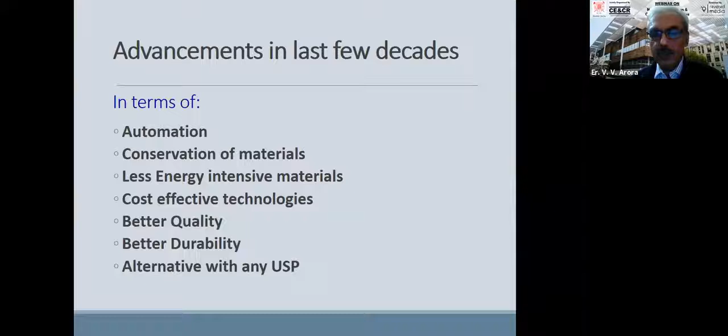The advancements have been in terms of automation, conservation of materials, less energy intensive materials, cost-effective technologies, better quality, better durability, and alternatives with any other USPs. Basic requirements when we do developments in civil engineering are that it should be a sustainable development and should be a safe development. Our focus has to remain on that, that things are sustainable and they are safe for the future.

For sustainability, we need emission reduction and conservation of natural resources. So we have to use low energy intensive materials, waste-based materials, use lesser materials, and increase durability, because if structures last longer, then also you are saving on materials, which is possible through proper design for durability. That is what we call performance-based design. You can optimize the design according to the performance, so you are achieving better durability and better sustainability.

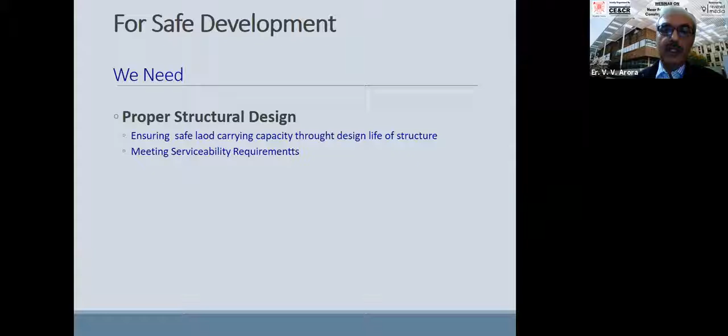For safe development, we need proper structural design, ensuring safe load carrying capacity throughout design service life and meeting serviceability requirements. And robustness, safety against unforeseen, unwanted actions, less fluctuations during the use, design for fire, design for blast, design for impact. Those are the things which are coming up.

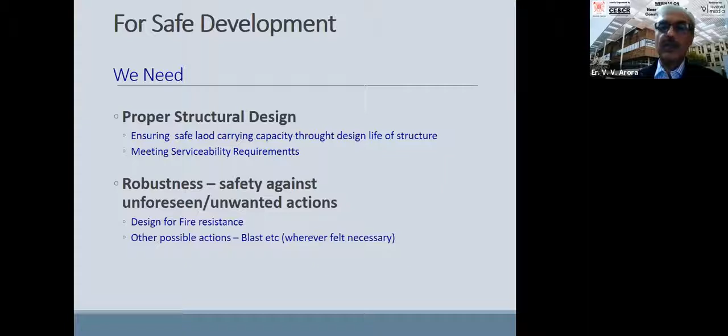Newer practices and materials, if you talk of, then increased use of materials we will see in near future is the supplementary cementitious materials, which are already in use in this decade, fly ash, silica fume, etc. Blended cements, slag cement, and now the tertiary blend cements are coming, composite cement, and LC3 cement, that is limestone calcined clay cement, is also coming now.

High strength concrete was there since long, but there were no specifications in our design. Our IS 456 did not have design parameters for high strength concrete. We could make high strength concrete, but designing structures with high strength concrete was a bit difficult. So that will become possible now. High performance concrete had come in NBC, but it is still to be better defined for better usage.

C&D waste-based aggregate usage has started, but it still has to go a long way. Precasting is increasing, precast elements, and that is also to go a long way in the near future. Other newer practices which have come now are pervious concrete, geopolymer concrete, controlled low strength material for backfill, etc. Because everywhere soil backfilling doesn't sustain, many times you have problems of settling of the backfills because we could not compact it properly. The new thing coming is 3D printing. There also significant developments have taken place.

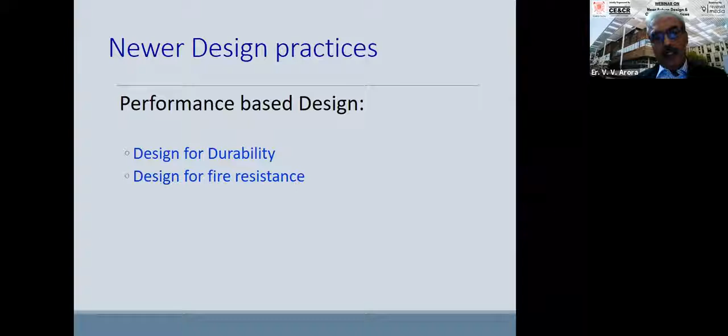Newer design practices are performance-based design, design for durability, design for fire resistance, etc. There's a lot of work on design for durability world over, even in our country also, but less on design for fire resistance. We will discuss that.

Then comes the role of standards. You see, we have seen many times technologies are available, but they don't get into much use in the absence of specifications and codal support. Recently, a lot of work has been done in this direction. This is necessary for promotion of newer technologies. Some BIS standards have been published or revised recently, and somewhere we are the leaders in the world also. Some standards are under revision and preparation. These are some of the revised standards and new standards in the last few years.

National Building Code came in 2016. There were big revisions in the fire chapters, and the sustainability and high performance concrete chapters had come in that. IRC 44 on concrete mix design has been revised, and pervious concrete has also come in that. Guidelines for use of C&D waste have come up in IRC in 2017. So that will also promote usage of C&D waste.

IS 383 for aggregates has come. That is, alternate aggregates are permitted, C&D waste is permitted in that, which of course will increase with the passage of time. We need more specifications. Specification for GGBS has come. Specification for ultrafines has come. Ultrafines are taking place because we don't have much silica fume in our country. Ultrafines are giving an alternative to that. So we will see increased usage of these materials because of the available specifications.

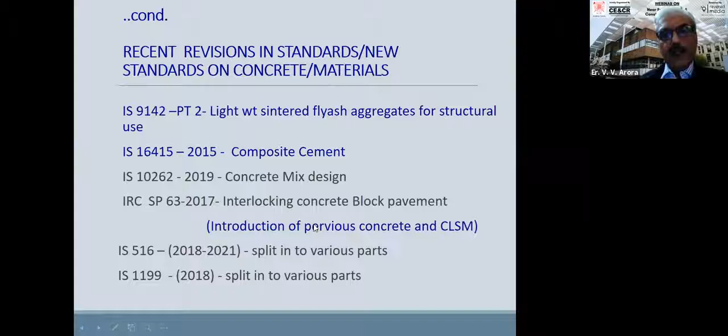IS 516, that is the test methods of concrete. This is a supporting code because without test methods, we cannot do much of the work. We cannot have developments. IS 516 has been split into various parts. This pertains to hardened concrete testing, and IS 1199 pertains to the fresh concrete testing. So this has also been split into various parts. Other numbers for the testing of concrete have all been merged with 516 and 1199, and it is in a systematic document.

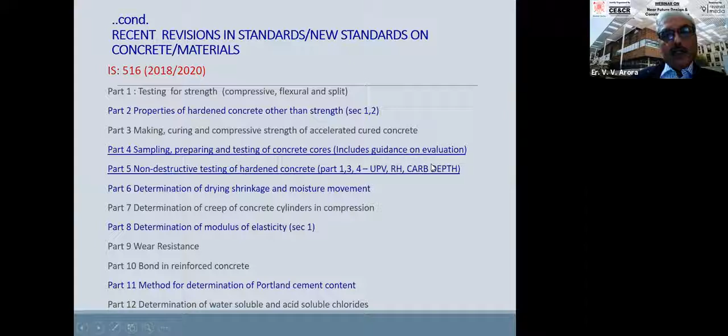This is 516. Some parts came in 2018, some came in 2020. And now we have durability testing also covered in this, core testing. Then we have included guidance on the evaluation of core tests, part 4 of IS 516. And this has been revised. Non-destructive testing has also been covered. UPV, rebound hammer, carbonation depth test has been added now. And determination of drying shrinkage, moisture movement, that has also come in this.

And in 1199, we see sampling of fresh concrete, determination of consistency. They were already there. But test of fresh self-compacting concrete has also come now in 1199, which was scattered here and there earlier. So these specification improvements will promote developments in the newer fields. Standards under revision are admixtures for concrete. Suggestions are invited from the industry on this. I had mentioned it in one of the earlier lectures also. More admixtures will be added to 9103, like corrosion inhibiting admixtures, crystalline admixtures, shrinkage compensating admixtures, and things like that.

IS 456, plain and reinforced concrete. This is the major code of civil engineering. This is also under revision. Major revisions will be taking place in this code, where we are talking of performance-based durability design, etc. And roller compacted concrete is available in IRC SP 68, but this is also under revision and will also be improved. Recently published standard is geopolymer concrete 2021, whose usage has already started to some extent, and more players are coming in. From abroad also, people are coming with patented mixes from Australia, from Finland, in the geopolymer concrete field. So we may see a good development in this area in the near future.

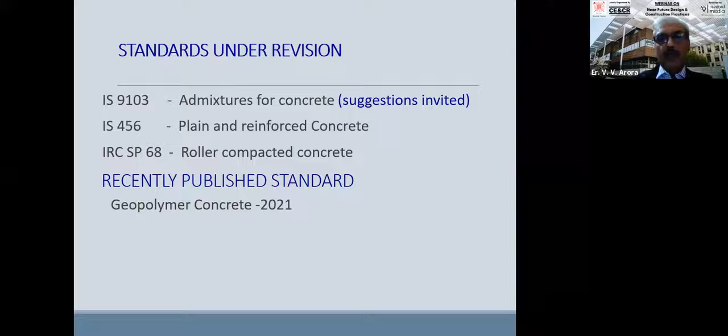Of course, it depends on the cost economics. If they can make it a little cost effective, you will have more usage. Otherwise also, this being a greener material to some extent, this will be a better development. Other upcoming standards are the precast sandwich wall panels. So precasting will see another improvement. Precast manholes, LC3 composite cement, and other precast things are also coming.

Two-lift concrete pavement construction technology is coming up, where you can have an inferior aggregate in the lower pavement and the better, harder aggregate in the upper layer. And similarly, you can have a lower grade concrete. So that means local materials you can use in the lower layers, and better materials in the top layer. This is not a very new technology, but in India it is not much in use. Now, automatic systems are also coming for this. I will not be talking much in detail on two-lift construction. I'm just giving an introduction.

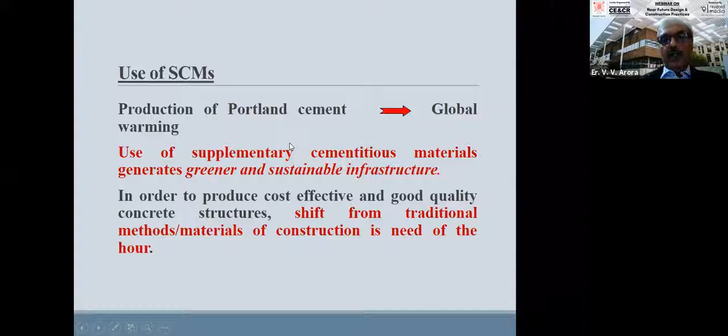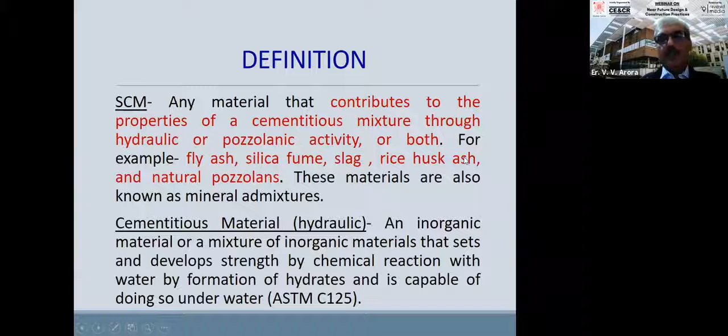Supplementary cementitious materials, this is not a new thing. A lot of work has already been done on this. This is just refreshing on that. It generates greener and sustainable infrastructure. Shift from traditional methods of construction is the need of the hour. Any material that contributes to the properties of cementitious mixtures through hydraulic or pozzolanic activity or both is called a supplementary cementitious material. In short, we call it SCM. So fly ash, silica fume, slag, rice husk ash, natural pozzolans, ultra-fine materials, they all come under this category.

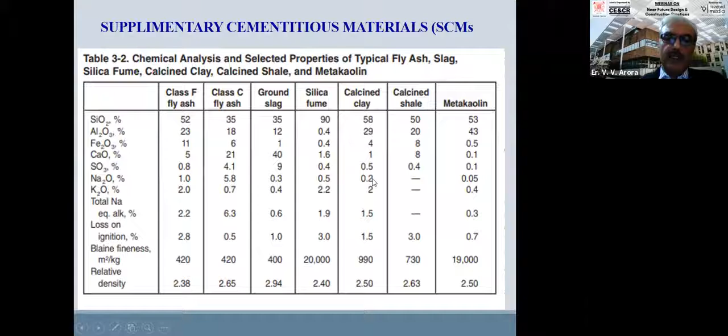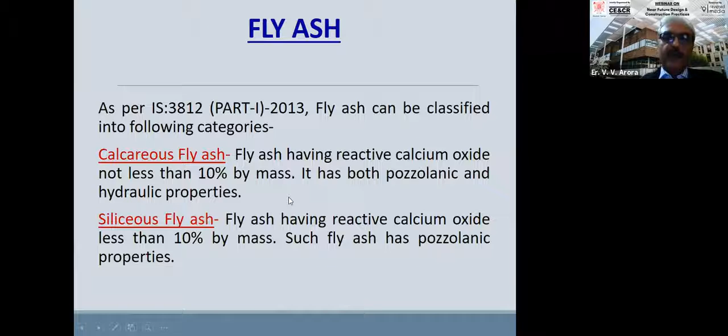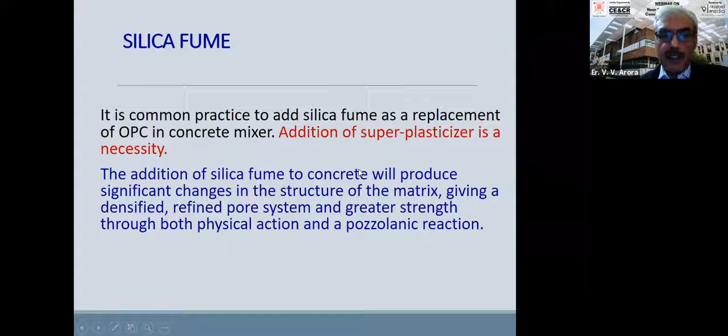The silica fume standard had come earlier, in 2003, long back. Addition of superplasticizer is generally a necessity when we use silica fume. The addition of silica fume will produce significant changes in the structure of the matrix, giving a densified, refined pore structure and greater strength due to both physical action as well as pozzolanic action. Guidance on this is being added in the mix design codes, IRC 44 and IS 10262. Generally it is used in the range of 2 to 4% and 4 to 7% for normal concrete, 8 to 10% for high strength concrete, and for high chemical resistance, 10 to 12% also.

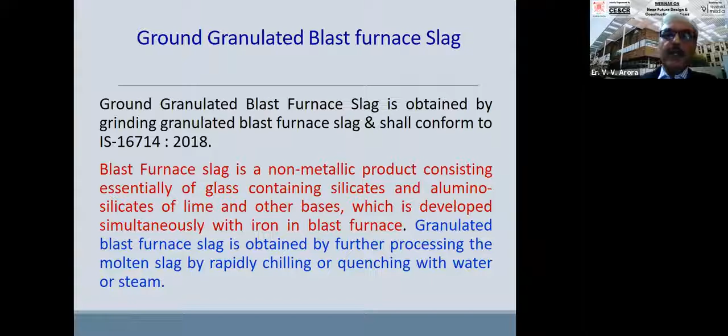GGBS, ground granulated blast furnace slag. This is a cementitious material, and a large quantity is being used in concrete and cement making. The only energy consumption is the grinding of the slag. The document for general use of ground granulated blast furnace slag came in 2018, IS 16714. It is a non-metallic product consisting essentially of glass containing silicates and aluminosilicates of lime and other bases, which is developed simultaneously with iron in a blast furnace. This is a very good material for concrete and cement, and it can directly replace cement up to 50% and even up to 70%. Our Portland slag cement has this provision of 50 to 70%. So either people use Portland slag cement, or it can be used in concrete at site wherever required, where proper mixing is possible.

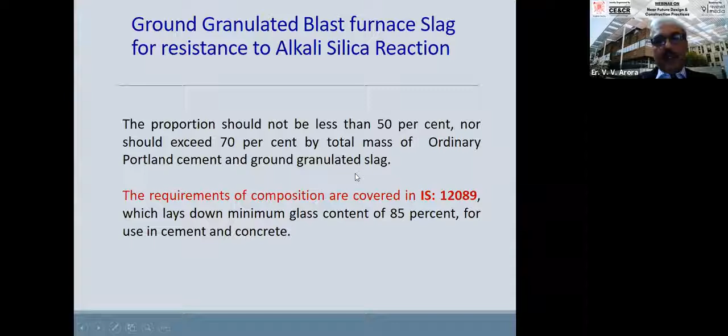The metakaolin document came in 2015. The fineness of metakaolin is 700 to 900 square meters per kg. It's a very fine, ultrafine material with very high pozzolanicity. But we are not making much metakaolin in India because of the clay limitation, as kaolinitic clay is required for this. However, we do have some kaolinitic clay reserves, so we will see some usage of this in the near future.

Now, this is a newer thing, ultrafine ground granulated slag. One is the granulated slag we just discussed, where we use 50 to 70%. But the same is then ground ultrafine. This becomes a kind of replacement for silica fume, which gives you more pore filling effect as well as pozzolanic effect. Cementitious properties are also there. Code provisions for ultrafine ground granulated blast furnace slag are given in IS 16715:2018.

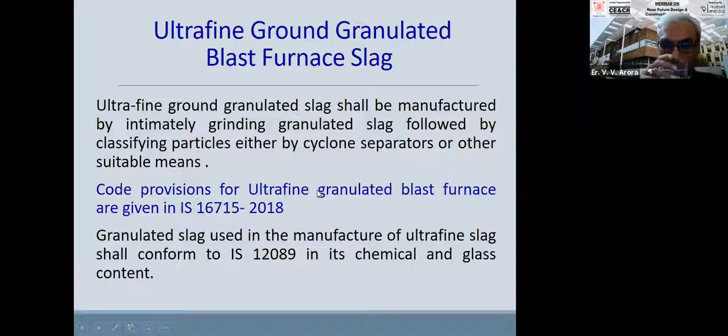The physical requirements for ultrafine slag are: D50, the diameter for 50%, should be less than 5 microns, and 95% of the material should have a diameter less than 15 microns. So this is a very fine material. Slag activity index is also mentioned. This material was already being manufactured, but the specification was missing. Now the specification is also there, so its usage is increasing day by day. People have already started using it, and as high strength concrete design parameters come in IS 456, more high strength concrete will be used, and with that there will be more usage of ultrafine slag and more usage of silica fume.

Composite cement is a ternary blend cement where we use Portland cement clinker, fly ash, and granulated slag. Sorry. Okay.

But the issue here is that the Portland clinker content is 35 to 65%. The only problem faced is that with 35% clinker content, the cement is less durable in terms of resistance to carbonation. That issue is being discussed in the BIS committees. So presently it is not recommended for use in RCC, but in PCC road construction you can easily use it. It's a green cement, a very good cement otherwise, but for RCC work it is yet to be permitted.

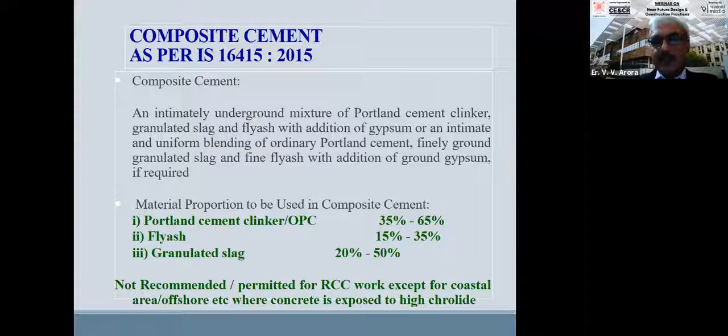In the composite cement category, we have got another cement, that is LC3 cement, we call it LCC cement, limestone calcined clay cement. That cement has been developed, but the standard is yet to come, so it is not commercially available as of now. But a proposal on standard making is already in process. That is also a composite where we have limestone and calcined clay. Calcined clay is like our metakaolin. So it is a similar technology: calcined clay, limestone, and Portland clinker. So that will also come in the near future.

High performance concrete is generally a high strength concrete, but with the specific requirement of higher performance for a particular requirement. This definition was very vague earlier. People had been using high performance concrete for long, but what is high performance concrete? There were no such documents. Now, in the last National Building Code, this was defined in a way, and categorization was also done. So slowly the usage of this will increase. In fact usage is already there, but the thing is to specify high performance concrete specifically.

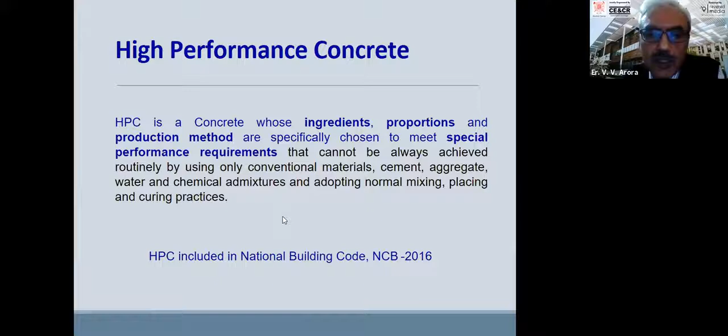The performance requirements have to be decided for a particular usage, for which we need some more research. As we have more research, we will have a better specification for high performance concrete. High performance concrete can be for higher workability and constructability requirements. We can have a high performance concrete where we have strength and strength-related properties. If we need a very high strength concrete, that is also higher performance. If we need a very highly durable concrete, that is also a higher performance we are looking for.

But then we have to specify those performances in numbers, and for that we should have certain data. Now for durability design, we are creating the data for durability design in IS 456. And for other requirements also, for example if we need high resistance to abrasion, we should know for what application what performance requirement should be there, so that people can specify. Researchers are working on that, and that will also come in the near future.

High performance concrete generally consists of these basic admixtures, nothing much special: aggregates, water reducers, plasticizers, mineral admixtures, chemical admixtures, fibers, polymers, corrosion inhibitors. Depending upon the type of improvement in performance required, admixtures are chosen and concrete is made. Some companies and RMC plants are already offering many kinds of things, but specifiers find it difficult to specify the requirements in terms of tests. If I say high impact resistance, I should be able to specify what high impact I am looking for, and for my usage I should know those numbers. More work is needed on that.

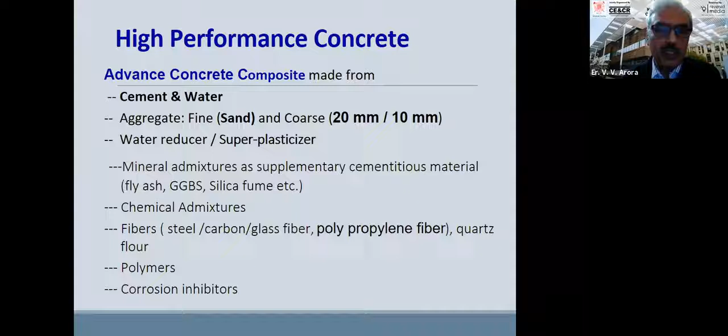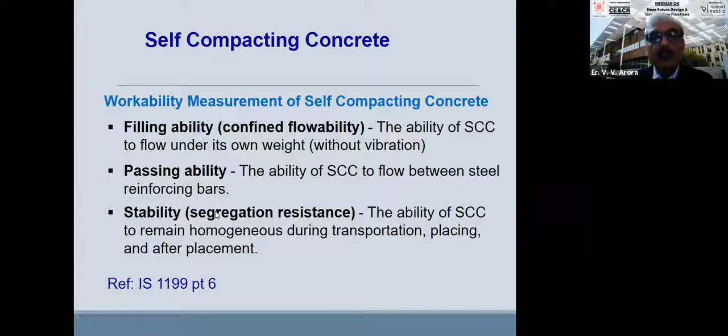High performance with respect to constructability is ease of placement, like self-compacting concrete. We can have high resistance to plastic shrinkage cracking, high resistance to drying shrinkage. For self-compacting concrete, we already have IS 1199 Part 6, where test methods are given. So this can be specified in those terms.

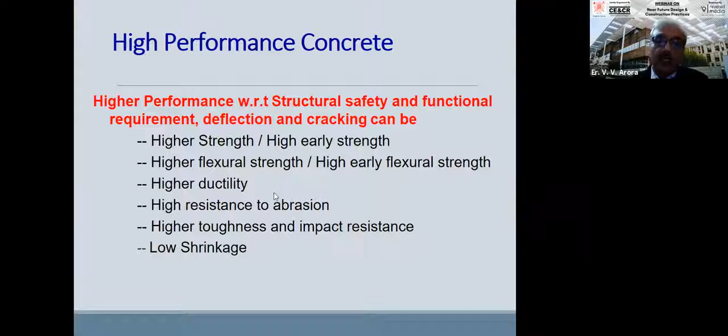When we talk of high performance with respect to structural safety and functional requirements, we can have high early strength, we may ask for high early flexural strength, higher ductility, high resistance to abrasion, as I already said, and low shrinkage and creep requirements.

Shrinkage reducing admixtures were being used in many developed countries, but in our country they are still not in use and not available in abundance. Some companies are making shrinkage reducing admixtures now, but they have to get them tested, and some standard has to be there for that. In the next IS 9103 revision, some specification will be available, so that if an admixture conforms to those requirements, we can call it a shrinkage reducing admixture.

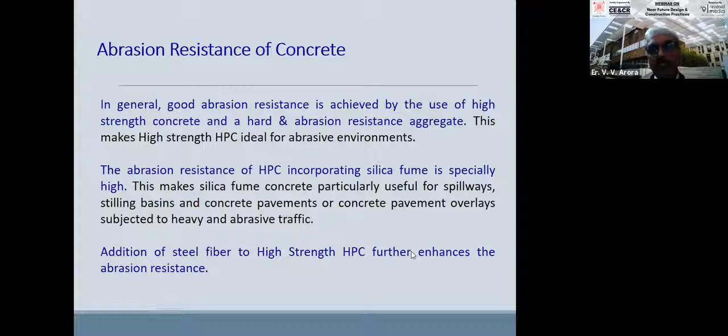Similarly, abrasion resistance I have discussed. Silica fume is particularly useful for spillways, stilling basins, concrete pavements, and concrete pavement overlays. Addition of silica fume has been found to give higher resistance to abrasion. Similarly, steel fibers have been proved to enhance performance in terms of abrasion resistance. So any high performance concrete required for spillways and stilling basins, we will call it a high performance concrete for higher abrasive resistance to the impact of boulders.

There we have to use silica fume and steel fibers. But again, as I say, the numbers still have to be fixed for using in spillways, and how much abrasion resistance is needed and how to test it for that. So more research is being continued in this direction, but we will definitely see them in the near future.

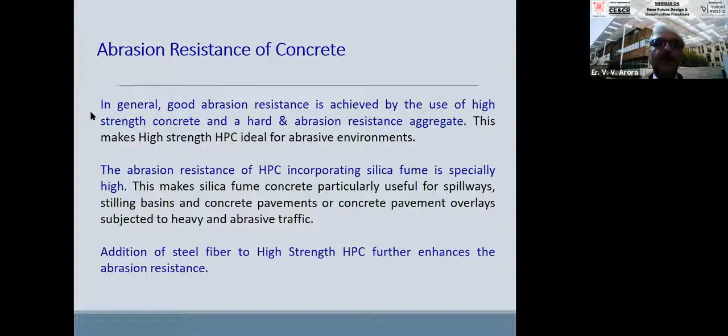Similarly, impact strength and penetration resistance. Incorporation of steel fibers increases the impact strength also. And silica fume also increases these properties. We do have test methods for this. Drop weight impact testing is there. For abrasion also we have got the tests. But then we have to decide the specification.

Concrete can be classified into various categories depending on strength. We have got low strength concrete. This is conventional, not as per IS 456. Categorization: low strength concrete is up to M20, and beyond M20, 25 to 50 is moderate strength. High strength 55 to 120. We call it now 65 to 120.

And then beyond 120 comes the ultra high strength concrete, which has already come. The researchers are working on that. Some companies are also working on that, which can be macro defect free concrete, densified small particle concrete. Reactive powder concrete is a common name for this also. And aggregates are missing, so that is why we call it reactive powder, because we don't use aggregates when we go beyond certain values. Aggregate-concrete mortar interface becomes a weaker zone, so aggregates are avoided.

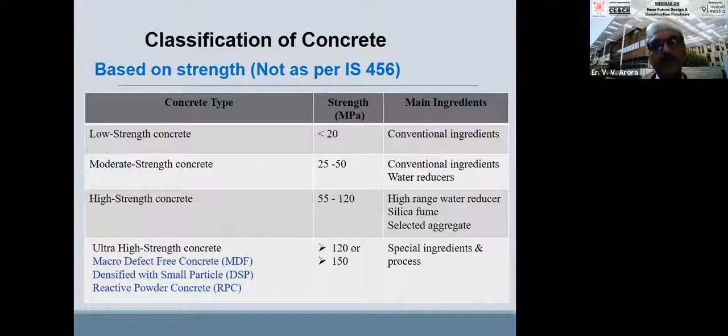As per IS 456, categorization is ordinary concrete, standard concrete, and high strength concrete. Ultra high strength concrete is not yet put in IS 456. It will take its own time once the technology is developed fully, properties are well known, and Indian material is tested for properties. Then it will be included in the codes.

Now in the coming code, IS 456, design parameters for concrete up to M100 are being added. Earlier we did not have design parameters for high strength concrete. We had this high strength concrete in our current IS 456, but then the note is given that for design parameters refer the expert literature, specialized literature. The new code will have detailed provisions for high strength concrete design.

So a structural designer would find it very convenient to use and specify high strength concrete, and those approving the designs will also have some specification in hand to approve those structures. So then the usage will come up, but ultra high strength concrete is still at a primitive stage. It will take some more time.

Same thing is there. Some findings summing up on these specific materials on high performance: addition of silica fume. It is a summary kind of what I have said earlier. It improves flexural strength, split tensile strength, abrasion resistance, and impact resistance. And inclusion of steel fibers enhances toughness, moment capacity, tensile strength, ductility, impact resistance, and abrasion resistance of concrete.

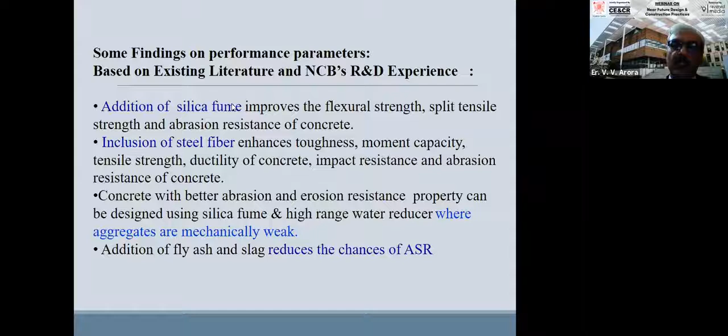Concrete with abrasion resistance property can be designed using silica fume, high range water reducers, where aggregates are mechanically weak, addition of fly ash, and a higher grade of concrete when used in combination with these materials really produces a high performance concrete. Because if our grade is low, then even if you add these materials, you will not be able to achieve a high performance concrete. That also has to be kept in mind.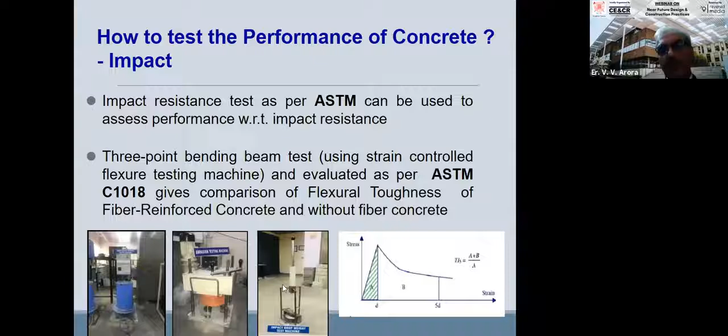This is a test for abrasion resistance. We have got ASTM for this, and IS will also come on this. We have got impact test also, this is the impact testing. So these tests can be used to measure the performance.

Coming to the high performance with respect to durability requirements, this I will discuss a bit later in this lecture, under performance-based durability design.

Before that, let us come to recycled aggregates. Recycled aggregates are construction demolition aggregates which are produced from construction and demolition waste. That is, we are recycling the old concrete.

In the forthcoming decade, the availability of naturally occurring construction materials is going to be exhausted. So the need for the present system is alternative construction materials like recycled aggregates, either coarse or fine, both of which can be generated from old concrete. If the old concrete is good quality, high strength concrete, you will get good quality recycled aggregates.

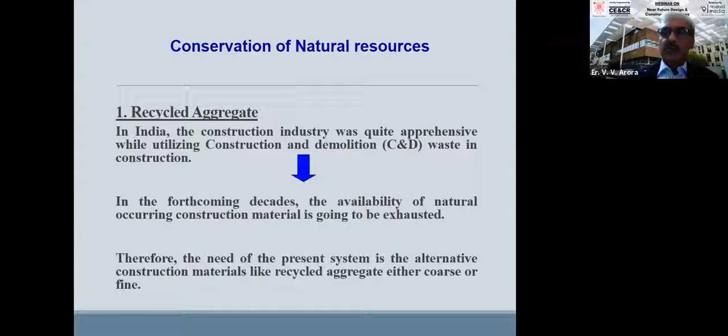If you are crushing very poor quality concrete, you will find poor quality recycled aggregates. These variations are a big hurdle in the usage of C&D waste. If somewhere a structure is being rebuilt, like if you are breaking a bridge and making a new bridge, or a multi-story building is being demolished and a new structure has to come up, there it becomes easier because the grade of the earlier concrete is also good and known. Then in-house crushing will be better instead of sending the scrap to C&D plants, because there it gets mixed up.

I see alternatives to natural aggregates. C&D waste-based aggregates, we are now mentioning in 383. Then we have other alternate aggregates, the slag-based aggregates: copper slag, air-cooled blast furnace slag, steel slag. Steel slag is to be avoided in RCC because it contains free lime. Now weathering plants are being put up to remove the free lime, but caution has to be taken. This steel slag, but air-cooled blast furnace slag and copper slag, they are very good materials. These two materials can be used. C&D waste, we are coming up with specifications, so this will be used.

Fly ash sintered aggregates, I already discussed. A new standard has come, 9142, in 2020, very recently, and IMFA is already making those aggregates in Odisha. NTPC is coming up with a new plant. So all these alternative natural aggregates will be available in the near future. Steel slag weathered aggregates will be there, but I will recommend that for usage in non-structural things only, not in buildings and all that, because if weathering is not proper we may have some risk.

C&D waste, if you see, we discussed already, comes in two categories. One is recycled concrete aggregate, the other is recycled aggregate. This is a better quality aggregate when we demolish waste concrete. And this is when we demolish a building and concrete and other things get mixed up, masonry, concrete, and those things. This can be used for some non-structural purposes. For structural purposes, we have to use RCA.

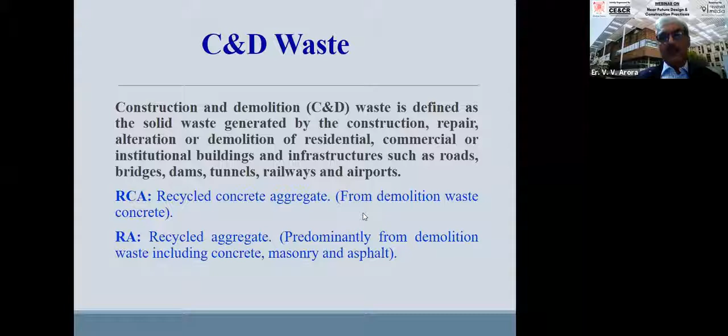The only thing is, the government has to come up with a collection system for waste. In all countries, we are generating a lot of waste, and collection systems are still not very good. Everywhere we have to create dumps in different areas where people can throw their C&D waste. Now people pick up the waste and put it anywhere in vacant space they find, and sometimes they put it on the roadside also, which is a bad scenario. Once that scenario is improved, usage will also improve, because as far as crushing is concerned, there's no such issue. Many plants will come up. Once people get the waste available, many people will be there to crush and sell it.

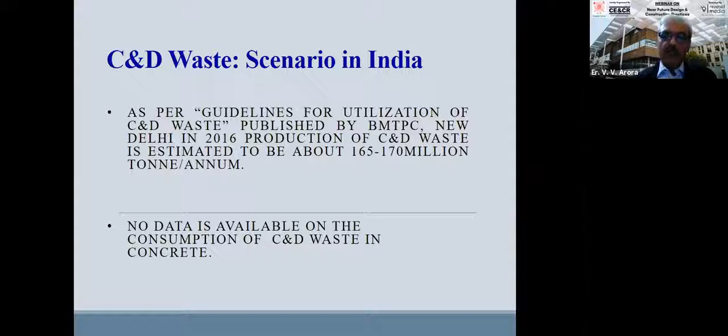In Japan, I had seen that even though they say 80%, they have got very good aggregates. They are crushing, and their old concrete is also good quality. But still, they were telling me that people have hesitation in using it in RCC, and even though they say 80% usage, the usage is mainly in non-structural applications, with some structural usage in lower grades.

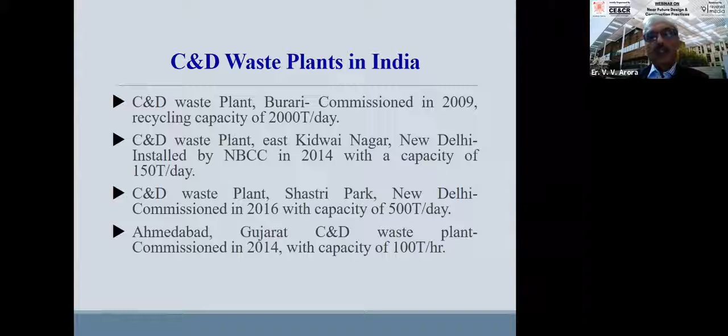Many plants have come up in India. This is the old list I have; a few more might have come in this category. So things are going on, improving all over India. This usage is already there, so it will keep on increasing.

But what is lacking now is the revision of the C&D specification. We have allowed them in 383, but we need a complete separate specification on C&D waste aggregates, where we categorize the aggregates into class 1, class 2, class 3, so that good quality aggregates are class 1, then medium quality and poor quality, so that aggregates coming from low grade concrete and high grade concrete are treated differently.

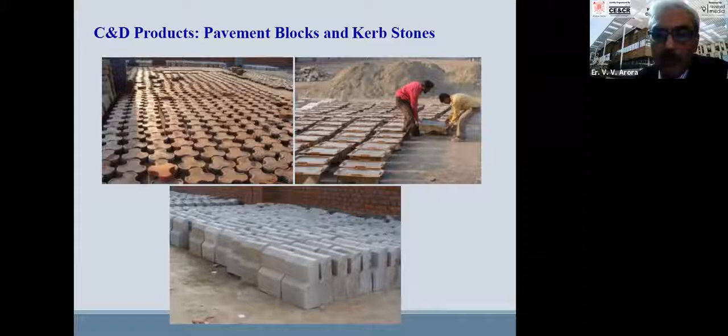If you have got class 1 aggregates, you should be able to use them in the main structural buildings. That work is still to be done, and as that is done, we will see more usage of C&D based aggregates. Current specification, we have IS 383, and IRC has put up a guideline.

You have got EN code, BS code, Japan Society code. In Japanese code, we have got classification of different types of recycled aggregates.

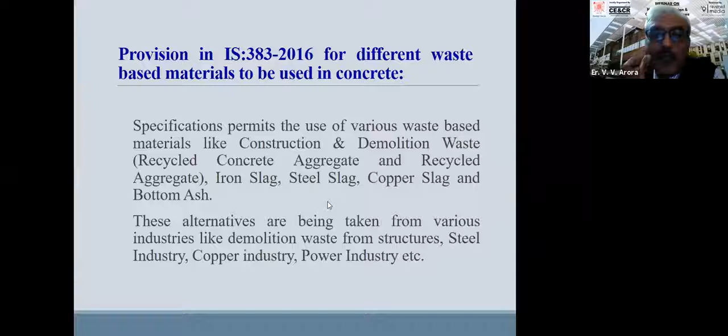Korean code has also got a recycled aggregate specification. In IS 383, 2016, the alternate aggregates were permitted - iron slag, steel slag, copper slag, and bottom ash were permitted. Similarly, the C&D waste also. In 383, 2016, recycled aggregates permitted are up to 25% for plain concrete, and for M25 and below, 20%, and for PCC 25%. IRC 15:2017, 30% has now been permitted in the DLC layer only, but the upper layer, the pavement quality concrete, is not yet permitted because the abrasion issue is there. But if we use a two-lift construction, that document is coming, there we will be able to use the C&D waste aggregates in the lower part of the PQC.

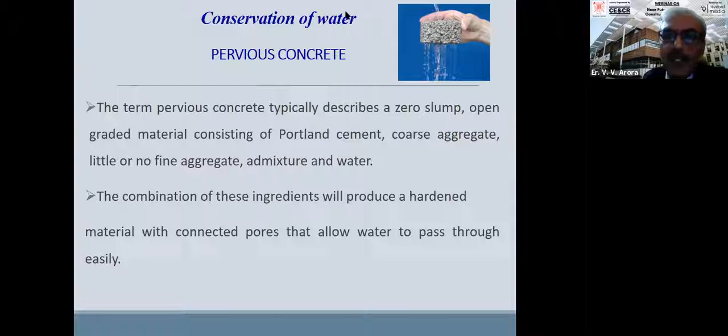Coming to the conservation of water, we have got pervious concrete. Pervious concrete is not very common in our country because there is an issue. This can be used in pavements where the water simply flows down, or it can be used under the roads as a drainage layer, because all roads have drainage layers where the water percolates to the ground or to the nearby drains. We can have a percolation layer connected to a nearby drain, and water can be allowed to flow. This is a concrete in which the water flows freely.

The void content ranges from 15 to 35% and strength is 5 to 25 MPa. ACI has a good specification on this pervious concrete, and ISO is making a specification on pervious concrete. This test method on pervious concrete has also already been made by ISO. The drainage rate is generally in the range of 0.135 to 1.22 centimeter per second.

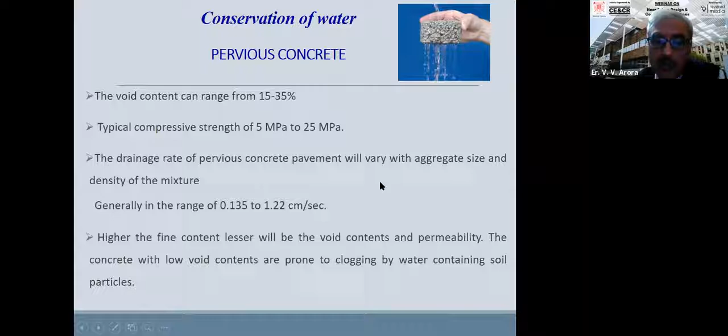Higher the fine content, lesser will be the void content and lesser will be the permeability. And choking - they are prone to choking also by water containing soil particles. That research is also needed, how to unclog that and where it can be used, where it cannot be used. Currently, IRC has permitted usage under the pavements so that it can act as a drainage layer. This is a very good material for that.

Geopolymer concrete - this is a new and very promising material. This is a concrete where we don't have cement. No cement concrete, many people call it. It only consists of fly ash, GGBS, and strong alkalis, and they react at the site in the mixer to form a concrete directly. A new standard has been published on this during... sorry, not last month, sorry, this is an old slide, maybe a few months ago.

This is geopolymer concrete paver blocks. We had made this in our laboratory at NCB when I was in NCB. This is a photograph of a pavement we made there as a test stretch. We made it here, and this has performed well. This is M35 grade of the blocks we had created. There were minor issues, but because of the equipment and all that, once we use better equipment, those issues will not be there.

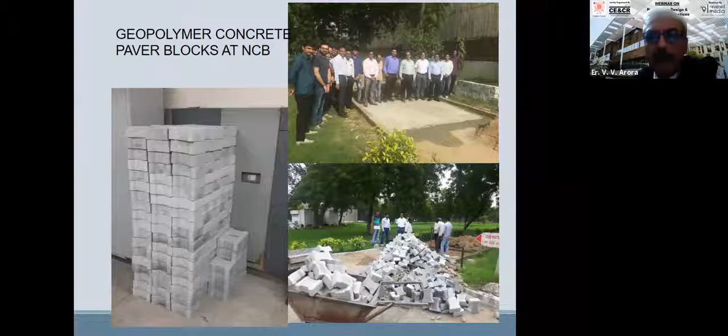And this is a very good material. This is a greener material, and there is absolutely no issue in using it in non-structural components like paver blocks, curbstones, and things like that. In buildings too, in Australia and elsewhere, people are using it in RCC construction. But here we are still not allowing it because we need to let people develop the competence. Let the players be there to do this, and then those things can be done.

Alkali activated materials have been defined in this. What alkali activated materials can be used, and what is the definition? Everything is there in the document. Binding materials that are permitted are pulverized fuel ash conforming to IS 3812, GGBS conforming to IS 16714, metakaolin. All this we discussed previously. Calcined clay also, silica fume. All these are the binding materials which can be used. It is mentioned in this document.

So different institutions, different people are using different technologies, different combinations. So we have permitted all kinds of things that you can do. You do some performance testing. It is also a kind of performance-oriented code where you can use any of these materials, and then you can create a concrete. If it meets the specification, you can use it. So initially, it is not for RCC.

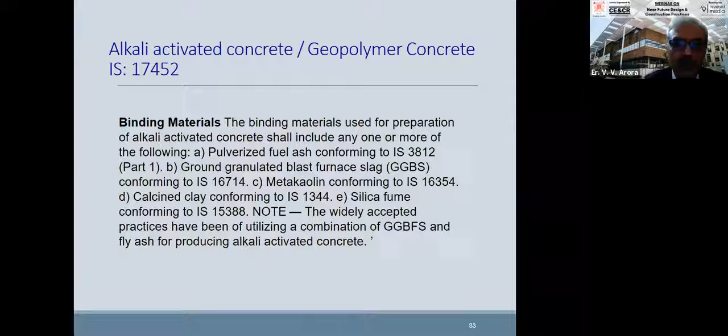Alkali activators. Alkali activators are generally sodium hydroxide, potassium hydroxide, sodium silicate, potassium silicate, sodium carbonate, potassium carbonate. Most commonly used activators are sodium hydroxide, sodium silicate, combination of sodium silicate and sodium hydroxide, combination of potassium silicate and potassium hydroxide. But others have also been permitted. So those who have done their work on that and want to use that, they can do it.

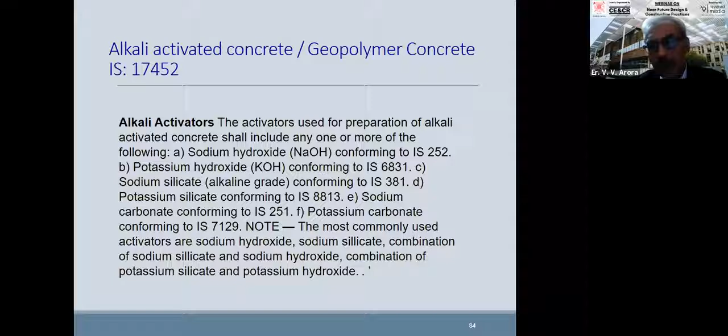But what we are lacking in our country is research on admixtures where we can improve workability. Issues are there. Quick setting issues are there when we do normal temperature curing. If you do high temperature curing, then the use becomes restricted to precast components. So this is possible at normal temperature also, about 25 or 30 degrees and above. And you can use high temperature also. So different combinations are possible. People are using different technology.

And this document gives a good guideline on creating mixes also. Guidelines for mix design are also available in this. Guidelines for production have been added in this. And safety precautions have also been indicated. These are quite risky to use. So those precautions have also been put in this document. It's a good document. One should go through this.

Now, what we are still lacking is we have made a document on the production of alkali activated concrete, but we have not permitted its use anywhere. Neither IS 456 permits it, nor any precast paver block code, nor the wall block code 2185 permits it so far. So we are working on issuing amendments to those codes, 2185 and paver block codes and kerb stones, so that this can be used there. Those amendments will come in the next few months maybe.

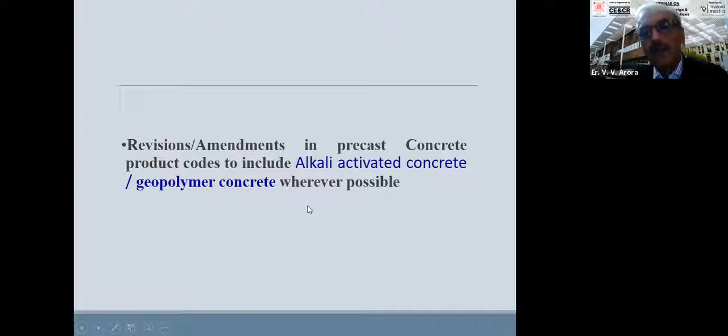So once that comes, then you will be able to produce blocks conforming to IS standards using geopolymer concrete. This will be a good thing. And there is a good future. Many companies are coming from abroad also, and Indian companies are also working on this. Mr. Sunny Surelekar, his company is also working on geopolymer, I think. He will throw more light on this when he speaks after me.

Then newer technology is, how much time do I have? Still half an hour or so I have.

Okay. Then we have this 3D printing technology. It's a very exciting technology. It saves a lot on labor. Though we don't have much problem of labor, still mechanization, as we have seen, improves the quality also, and many times it improves the speed also. It is not only about labor saving, because labor will be used elsewhere in making this equipment and other things, and so much infrastructure will be created.

This is three-dimensional printing, and it's fast work, and for many things it will be a very good alternative. It is 3D printed concrete, meaning 3D printers come up when you make an AutoCAD drawing. Now the current AutoCAD has a provision for creating STL files. If you make a 3D model in AutoCAD 2019 and above, I think, you can save your 3D models in STL format, and those STL files can directly be used by the 3D printer equipment to create that structure. The only thing is you have to mention the scale and all that. Those are the print commands.

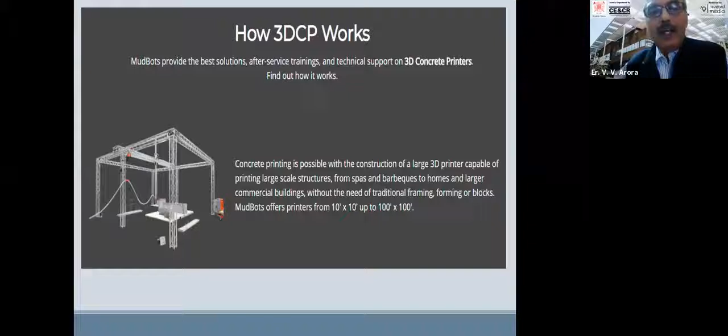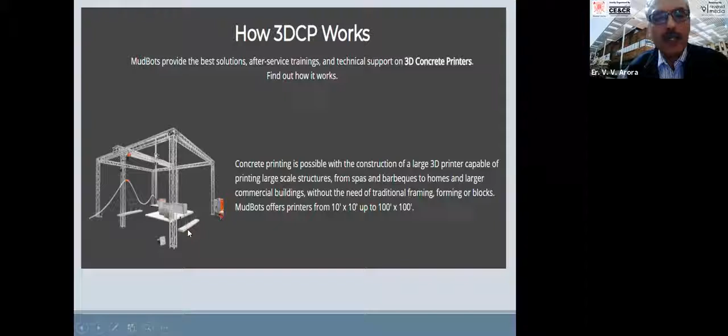And now this is a kind of schematic diagram of the 3D printer. You have gantry cranes where this printer moves. This printer is hanging there. It moves left, right, and to and fro, and keeps on printing the structure layer by layer. This is another view. This is a gantry, and this is a printer nozzle from where the concrete will come, and layer by layer the structure is printed.

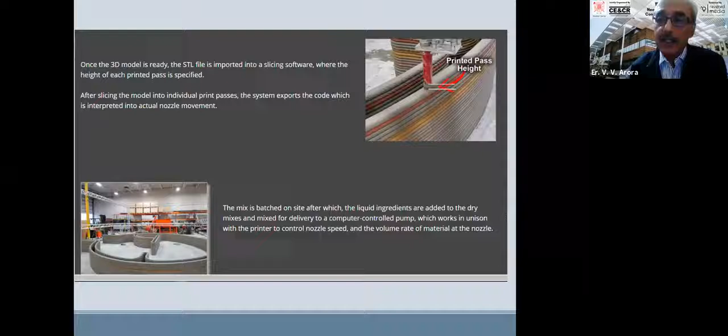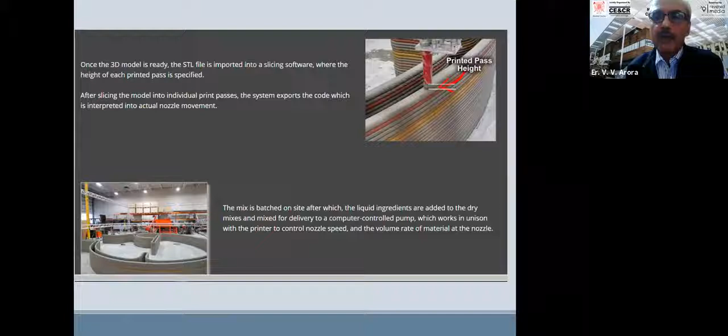The only thing is you need a good printer, and then what you need is a fast setting concrete which fulfills the requirement of 3D printing, which generally is created using admixtures of accelerators, viscosity modifiers, and things like that. And for many small things nowadays, you can even create a drawing and send it to some suppliers. They send you models. But for actual construction, you need this kind of printer at site.

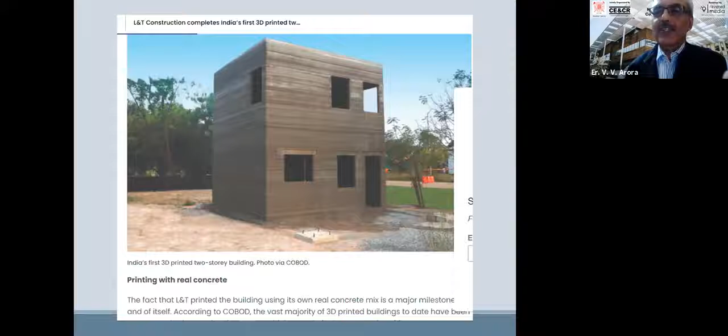And this is done by L&T. L&T is also coming into this. They have constructed a 2-story house using 3D printing. This is also a 3D printed house. So as this thing comes up, more guidelines and specifications on this will also come slowly. If it becomes popular, then the experience is there, competence is developed. Once the competence to construct develops, then competence to make specifications also comes from there, because for making specifications also you have to have competence.

This is a flowable concrete kind of thing, and this is being used in the backfilling of trenches. It's adjacent to a building foundation. So this is the building foundation wall. You cannot put a roller here and start compacting; it becomes a difficult scenario, because that will have a lot of horizontal impact. So these things are useful. This is also coming up.

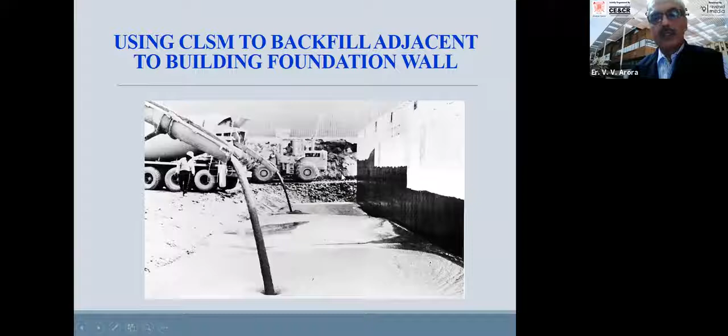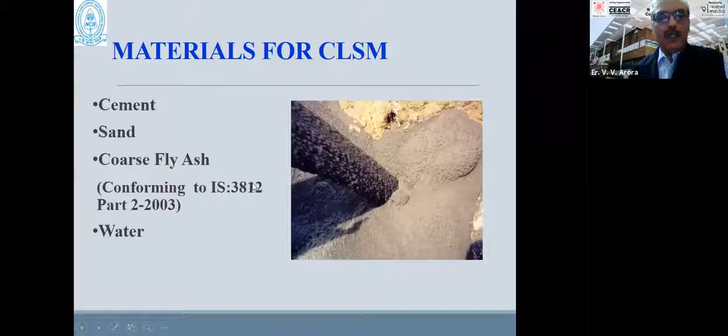We have got a specification. Now IRC has also given a small specification on this, as I mentioned earlier. It contains cement, sand, coarse fly ash. Coarse fly ash is good for this. IS 3812 Part 2 is good. Mix proportioning guidelines are available. Cement content varies from 30 to 70 kg, and fly ash content varies from 460 to 1200 kg.

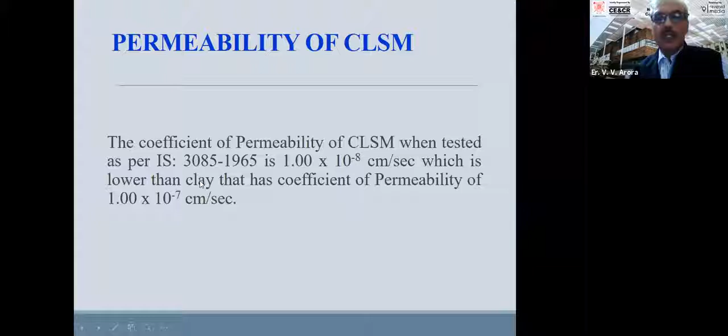Permeability of CLSM can be tested as per IS 3085, and this is 10 to the power minus 8, which is lower than clay. That is the coefficient of permeability of this. So it's a bit lower permeability than clay, but it is stronger.

Future aspects of this are that it will be very difficult to find soil for backfilling. That is one thing. But second, what I feel is even if you have soil, there are many places where you have compaction difficulties. So they're also very useful. IRC SP63, interlocking concrete block pavement, mentions some specification about this. This can be used under that, because roadside we are putting the interlocking

pavement where our future services are. So that part is left as the block pavement. So once we remove that, then you should have a CLSM filling there. That is why it has been specified there. Coming to the durability, which we were discussing earlier.

Now we had been discussing the developments in material technology and concrete technology. Now these are the developments in design technologies, how we design our structures. When we design our structure, we design for a certain strength and we have to design for a certain life. But today our codes are silent; if you made a structure as per IS 456, you cannot guarantee how much life it will have. People generally say 50 years, but the code doesn't say 50 years.

So if you have to design a structure for 75 years, you don't know what specification you have to improve upon. The CPWD maintenance manual says our structures should generally be for 75 years. But how to make it 75 years, nobody knows. So service life design is a performance-based design where we decide the performance. Performance is that we want this structure to survive for 75 years, or 50 years, 100 years. So that is a performance requirement. That means the structure should be able to perform till that age.

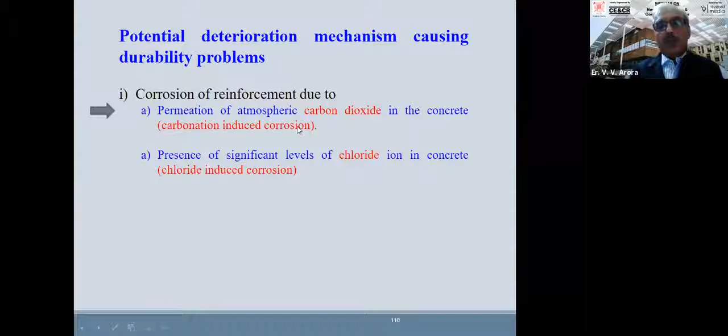This is only in the coastal areas or in some industrial environments, in some specific locations. But in all non-coastal areas, this is the main deterioration mechanism. Wherever we see spalling around our buildings, that is all because of carbonation happening. So I will be discussing more on carbonation, since we have limited time in this presentation. Other mechanisms of deterioration are abrasion, freezing and thawing, chemical deterioration, sulfate attack, alkali aggregate reaction, but those are at a smaller level. I'm not discussing them today.

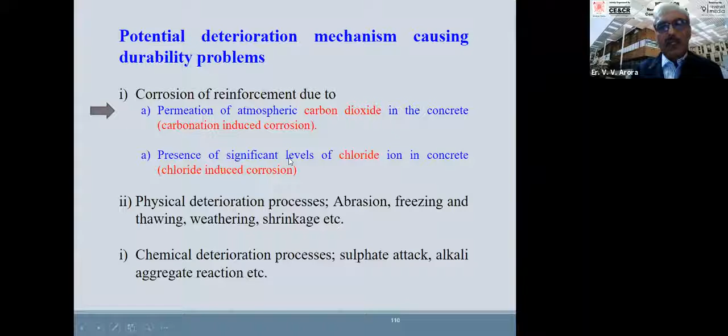The concept of service life design is there world over, but everywhere they are finding it difficult to make specifications and design procedures for it. There's a model code for service life design, Bulletin 34. It came long back, but this is only a model code, not a country code. ACI had a report, ACI 365, but this is also not a standard or specification. It is a committee state-of-the-art report. So they don't have a standard or specification in America on service life prediction either.

ACI Life-365 has become famous because it is software. But this software, we have seen, doesn't give very good results, and it is not of much use to me. Then we have an ISO document, ISO 16204, which was revised in 2012. This is a good document, but it also speaks of the basic concept of service life design. It gives models for assessment of the service life. But many coefficients required are missing, and they say at the national level it

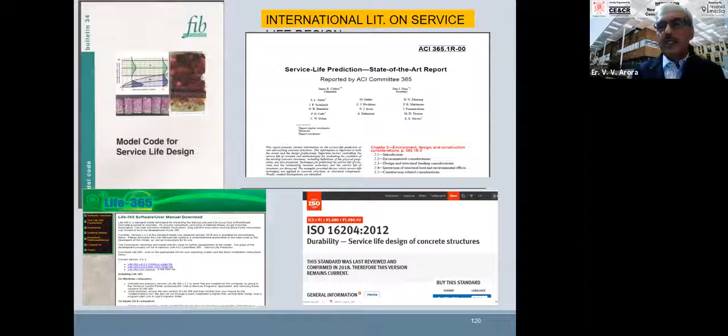should be established. We have done a lot of research in this area, and other institutes, IITs also, are working on this, and we are able to work out those coefficients and the procedure for design for carbonation. Current developments, as I've said, the fib model code is there, similar to 16204. Japanese guidelines are available, ISO is there.

And when it reaches the cover concrete, it depassivates the concrete. When the carbon dioxide enters, it consumes the calcium hydroxide available, and the pH value of the concrete comes down. A lower pH then breaks the passive layer around the reinforcement, and reinforcement starts corroding from that time onwards. And once the corrosion comes, the cracking and spalling occurs.

So if the carbonation depth is less than the cover depth, the structure is safe. When the carbonation depth reaches the cover depth, then your service life is near completion. The corrosion will start occurring over there. You will have a few more years after that, but then it starts in a fast manner. So the only issue is how to determine how much time it will take. Once we determine that time, we have determined the service life in a way.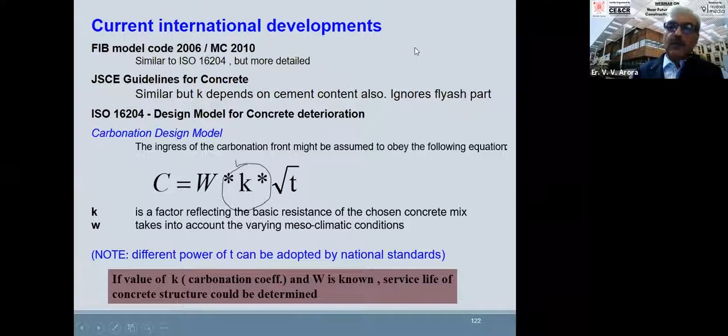So considering this model, now this is being considered for the performance durability design for carbonation. And the details of these are being worked out. The weather coefficient is also being worked out based on the many investigations conducted in the country on deteriorated buildings. From there, the weather coefficient is being worked out, and that will come in our new IS 456 standards. We will be giving methodology to work this out and simplified tables also.

Last lecture, Mr. Oja had given detail on this, and there was some criticism that this is very complex, but it will not be complex because simplified tables will also remain, and calculation-based design will also be possible. So those who want to do important structures or want to go into detail, they will be able to. Those who want to use simplified tables, as they're using now, they will be able to do that also.

General findings about durability are that PPC and PSC are more durable than OPC in coastal environments. PPC, Portland pozzolana cement, and PSC, Portland slag cement, are more durable than OPC in chloride coastal environments, where we have chloride ingress. And OPC is more durable compared to PPC and PSC in non-coastal, non-aggressive environments where distress due to carbonation is critical, as in North India mostly.

So points to be taken care of while using PPC are by early age strength, curing period, and extra cover to take care of carbonation. If you use a little higher grade or a little more cover, then the deficiency is covered up. So in the new IS 456, you will have complete details on those things: when you're using this kind of cement, what cover will be required, what grade of concrete will be required, and things like that.

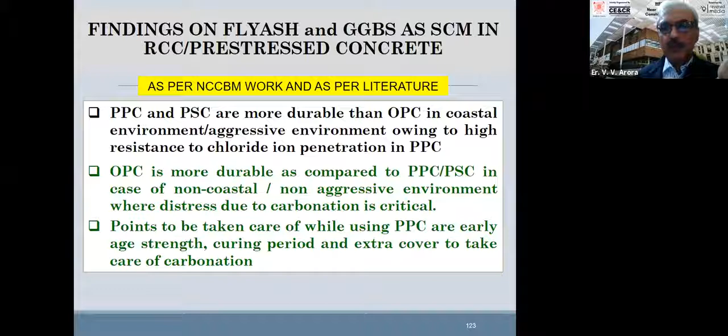And then you can test the carbonation coefficient also. We give carbonation coefficients, carbonation resistance coefficients, based on the water cement ratio and type of cement also. That will be for simpler usage. And you will be able to test it also in the laboratory.

So the major changes likely in the durability provisions: performance-based design is coming up. The concept of design for durability is being introduced, that this is a performance-based design. The concept of service life is being introduced. Provision for durability design for 50 to 100 years. Exposure classes different for different deterioration mechanisms.

Today our exposure classes are not different. Whether it is a carbonation mechanism or a chloride mechanism, we don't differentiate it. But Eurocode has different exposure classes for structures where the critical deterioration is carbonation and where the critical deterioration is chloride attack. So we have different mechanisms, so we should have different exposure classes.

So in a way, in simplified form, we will have more exposure classes depending upon the type of environment. So we will have more exposure classes to choose from. So we are putting a map of India also, with climatic zones indicated, from where it can be selected and linked to durability. And the effect of quality control levels to be considered while designing for durability will also be there.

If you are having a higher level of quality controls adopted at site, then lower factors of safety can be there. But if you are adopting a lesser level of quality controls, then you will have higher factors of safety. And what will be the level of safety, how to define the level of safety, those details will also come. The quality control chapter will be revised, and in that, the quality control provisions will also change to some extent.

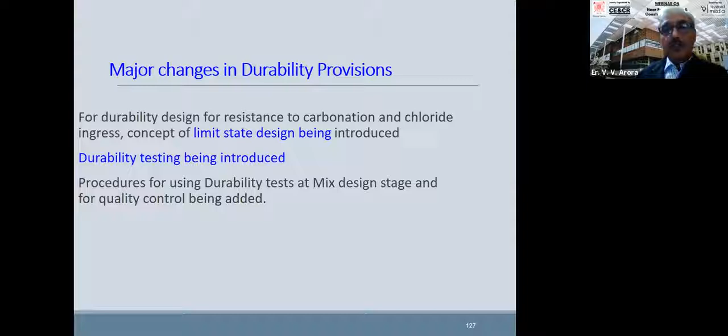When we are designing a building for a particular strength, we call it a performance-based strength design. So that is a strength design, and then we check also the strength. Cube testing we do, and flexural testing we do. Similarly, once we introduce durability provisions, then durability testing also has to be done.

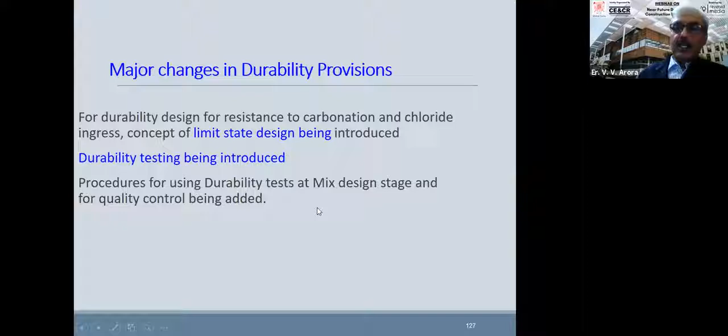Durability test procedures can be: we can have a resistivity test, we can have an RCPT test, air permeability test, and then we will have an oxygen permeability test. For oxygen permeability, a new code has also come up. A limit state of design for carbonation chapter will be there.

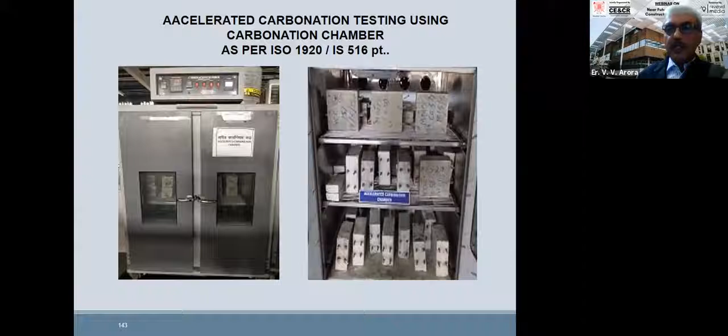Now, this I say durability testing. This is also durability testing. This is a long-term test for durability. This is the accelerated carbonation chamber. This test takes about 70 days, from where we determine the carbonation coefficient to be taken in the design model. Similarly, we have got a test method for the chloride diffusion coefficient determination. That is also a 3-month test. And for quality control purposes, we will have quicker tests.

So now these are the tests which are used to determine the carbonation coefficients. Now either you determine from these coefficients, or from the equations which we will give in the code based on the water cement ratio and type of binder. Then for quality control, we will have other durability tests, like I have mentioned, the RCPT test, resistivity test, air permeability test, and the oxygen permeability test.

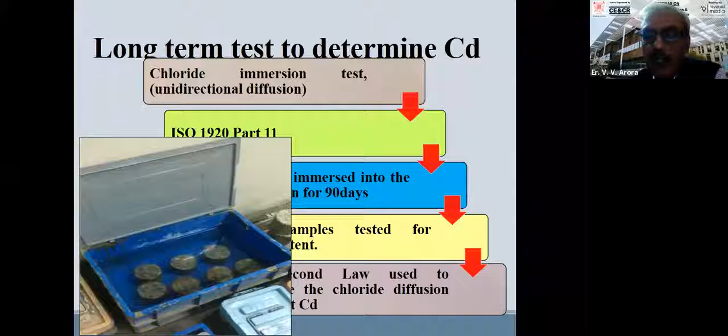So that at the time of mix design, whatever values you are getting on resistivity or RCPT, some 90% of those values it will be achieving in the field, for which samples can be constructed. Just like we construct cubes, we can have small slabs, 1 feet by 1 feet, for durability testing, in addition to the cube testing.

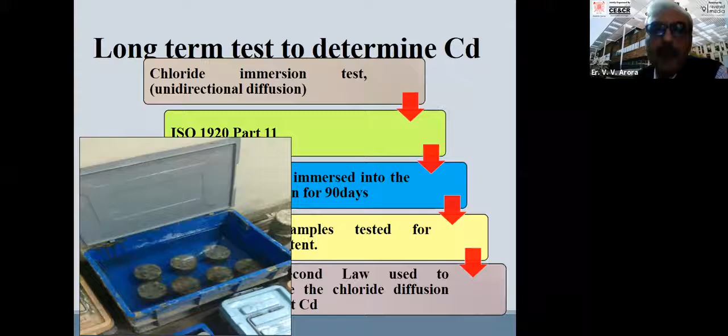Sulfate attack, there will be some improvement in IS 456, but this will not be durability performance-based design, so I am not mentioning much on this. The draft revised IS 456 will go for wide circulation after approval of the panel and CED, which will come very soon for public comments. At that time, you all can comment on the provisions for further improvements. Then similarly, design for fire.

This has also got a lot of scope for performance-based design. This is also coming up world over, this talk is going on world over, and some research is happening on this issue. But standards and codes have not come up on this performance-based design. New Zealand code talks of performance-based design, but it doesn't give much detail, and it is left to the consultants. So this is not common, I will say.

New Zealand building code has provisions requiring time temperature curves for different scenarios. What is performance design for fire? Like for durability, we should know the performance requirement and then our structure should be resistant to that. Similarly, for fire, we should know the exact fire load in a type of structure, the type of material stored in the building, type of construction material used. We should know what will be the time temperature curve if fire occurs, and what firefighting measures are already installed that can be accounted for or categorized. Then we require a time temperature curve for different fire scenarios.

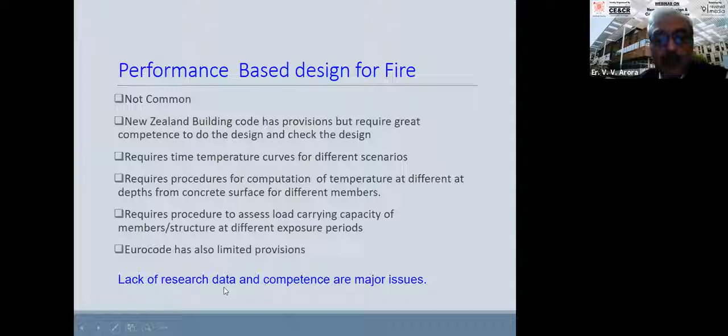Eurocode has also got limited provisions - they also give enabling provisions. So in our revision of IS 456, in the fire resistance part, we are also facing this issue, and there are two issues: lack of research data and lack of competence. Competence is required at two stages - one at the design stage, competent to do nonlinear analysis and those things, and then the people checking and approving the designs should also be competent.

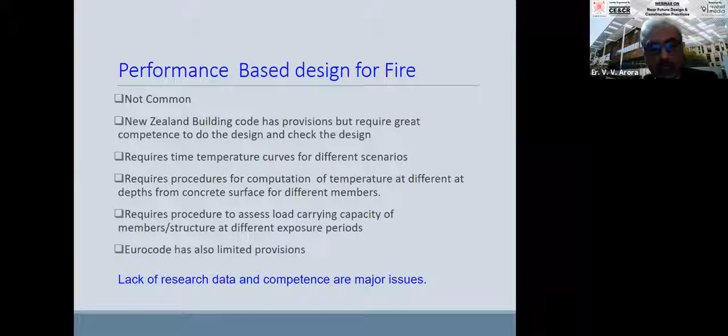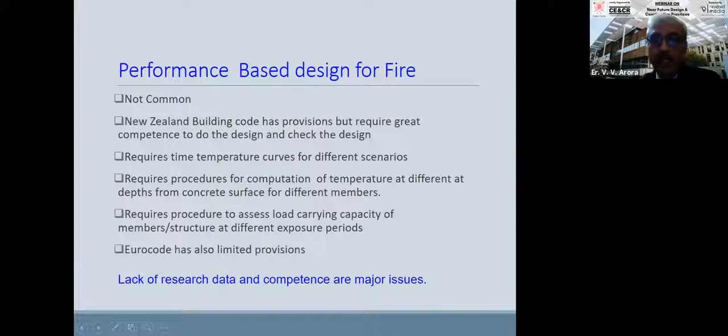In our country, research is very limited on fire, and data is also very limited on fire accidents. In the fire accidents happening in our country, we are not collecting data on how long the fire was there, what temperatures were reached, and all those things. Once we start collecting that, and more research happens, then we will come to that. As of now, we are not jumping to performance design for fire. What we are doing in the next revision, as I know, is giving enabling provisions - like the strength reduction which comes over a period of time, that data we are giving in the code.

If we are using this kind of aggregate, what will be the strength reduction? So if somebody wants to calculate, he should be able to calculate the stress-strain curve at high temperatures, for steel and for concrete at different elevated temperatures. Then the strength reduction in concrete strength for different water-cement ratios at different temperatures.

Those curves will be added, taken mainly from the Eurocode, but we have verified in our limited studies at NCB. They somewhat resemble that, so we feel those curves can be utilized.

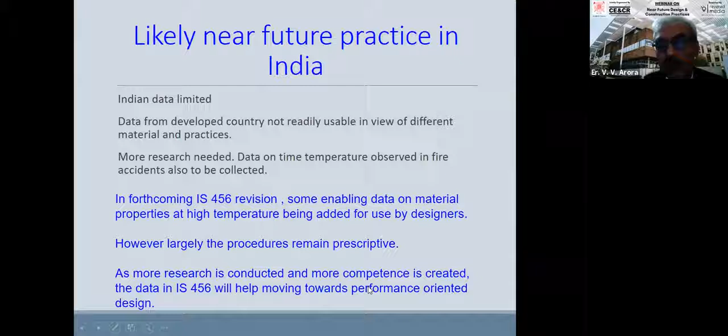So likely near future practice will be- the Indian data is limited, as I said, and more research is needed. In forthcoming provisions, some enabling provision will be added. So largely it will be a prescriptive specification only, where tables will be given like we have now, but it will be upgraded. As more research is conducted and more competence is created, the data in IS 456 will help move towards performance-oriented design. That is what I have as of now.

Thank you very much. I think I am well within my time.

Yes sir, I think you're fantastically well in time, and that was actually quite an interesting and very broad spectrum kind of approach to seeing where we are going as the technology progresses. Actually, even while going through the presentation, what surprises me tremendously is...

I think we have got codes for almost everything. Even modern materials like fly ash, metakaolin or silica fume have been around, and even more recent things like ultrafine GGBFS. So we have codes for a lot of things, but the mainstream adoption is still somewhere lacking a bit. So what would you say would be things we can do as an industry to get these practices through?

Which particular thing are you talking about? Even for materials, for brand new materials, the adoption rate in general construction is very low- maybe a few specialized constructions use it, but for durability enhancement and all, the application rate is very, very low, abysmally low. So how do we get these new technologies into the mainstream part of construction?